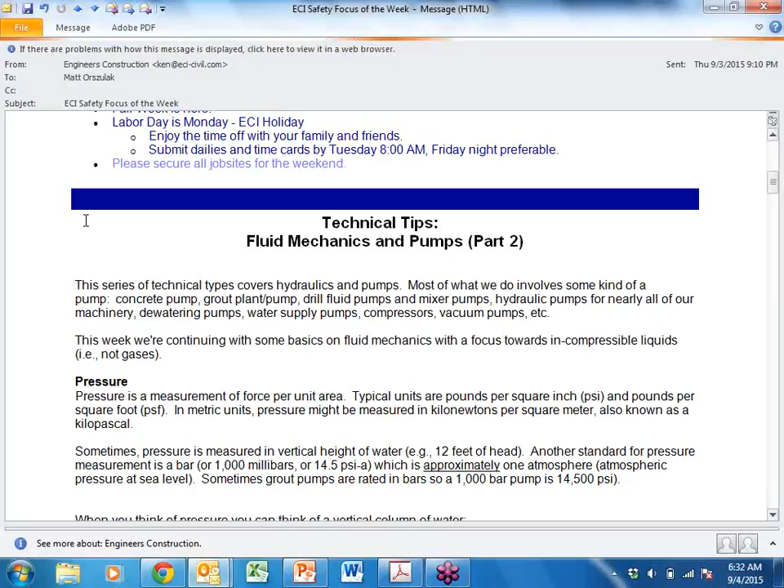Technical tips: we've been talking about fluid mechanics and pumps. This is just the second in our series here, covering hydraulics and pumps. Most of what we do involves some kind of pumping - we pump concrete, grout, drill fluid pumps, mixer pumps, hydraulic pumps in nearly every piece of equipment. We have dewatering pumps, water supply pumps, compressors, vacuum pumps, chemical injection pumps. Right, Larry? Larry's shaking his head, oh no.

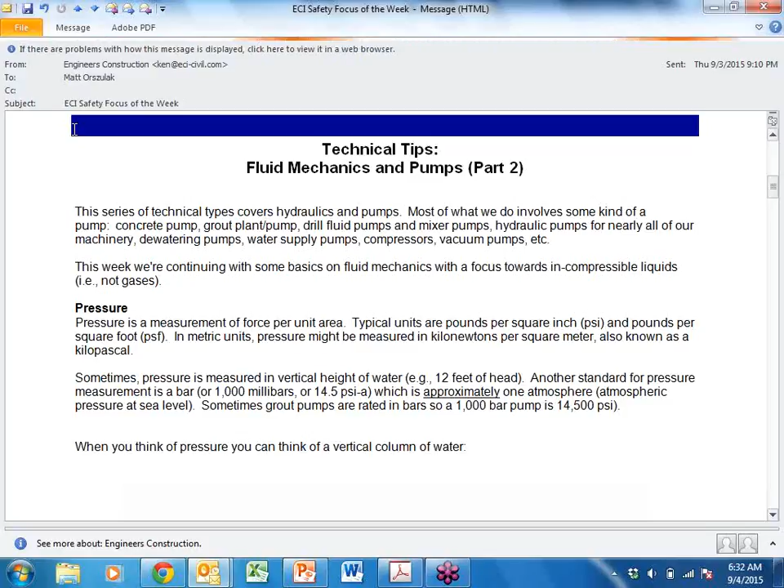This week we're continuing with some of the basics, and I want to talk about pressure. Last week we were talking about unit weights and specific gravities, but this week we're talking about pressure. Typically, pressure is a measurement of force per unit area, so typical units are pounds per square inch (PSI) and pounds per square foot (PSF).

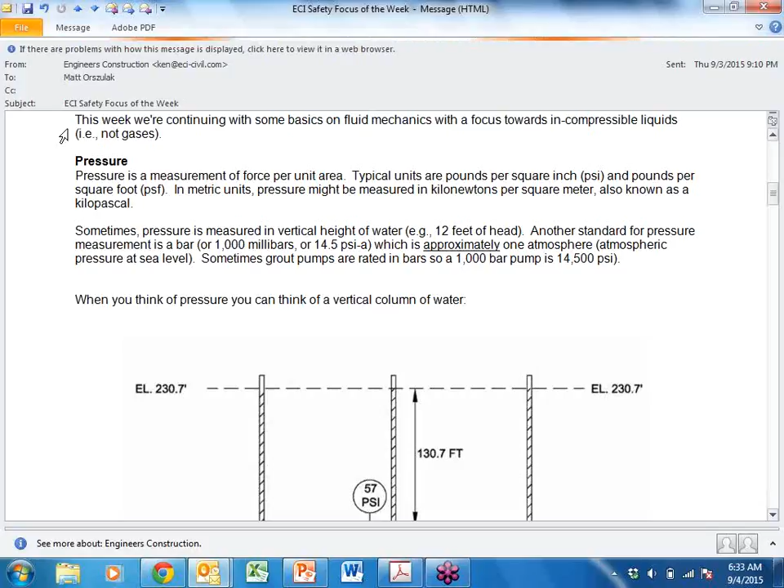One thing I can never get my head around is metric units - pressure can be measured in kilonewtons per square meter or kilopascals, whatever all that is. Sometimes we measure it in vertical feet of water, which is also hard to wrap your head around, like 12 feet of water. Another standard is a bar, and we hear that on the weather - the barometric pressure is 985 millibars. So 1,000 millibars is 1 bar, and that's the atmospheric pressure at sea level, more or less, roughly 14.5 psi.

So there's actually a pressure out around us, and I said approximately 1 atmospheric pressure at sea level - not really sure why an atmosphere isn't really a bar, but it's slightly different, just to make things complicated. Even pumps, like a grout pump, are rated in bars - there can be a 1,000 bar pump, a pretty high pressure pump, up to 14,500 psi. Those are usually used for jet grouting, something we don't really do, but it's a high pressure injection of grout in the ground to mix with the soil.

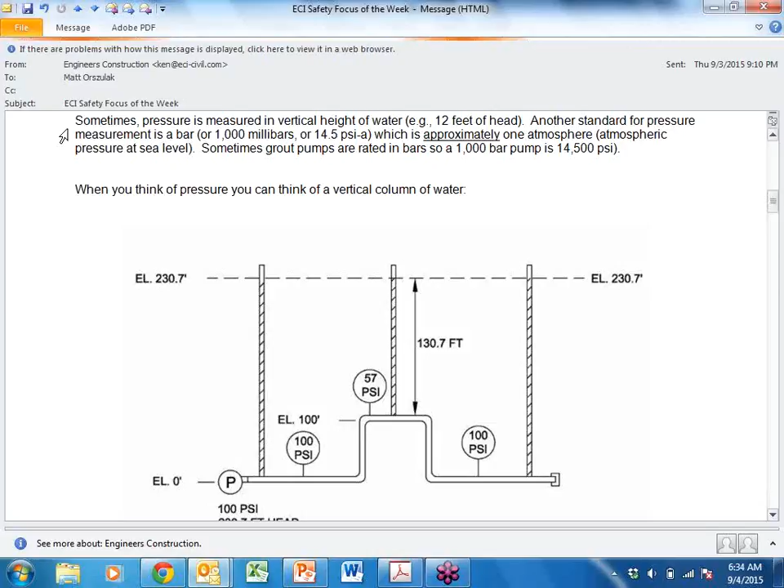I want to talk about how to think about water pressure, or any kind of pressure, with water as the example. Imagine a pump with a water line, measuring with any kind of glass tube, if it can handle the pressure, coming all the way up. If you're pumping at 100 psi at the pump at elevation 0, the pressure would be a head pressure of 230.7 feet - that much of a head, or column, of water. And when talking about a column of water, it doesn't matter whether it's a small glass straw or a big pipe - either way it would push to the same height. That's something a little hard to get your head around.

And if the pipe goes uphill, say up 100 feet, it still has the same pressure head at 230 - the PSI just drops. If it goes back down, it'll continue at that same pressure head for the whole system. Now this is static - if we had a valve in there and started turning it, things would change, depending on where the pumps were and the back feeds and everything. So from there it gets more complicated.

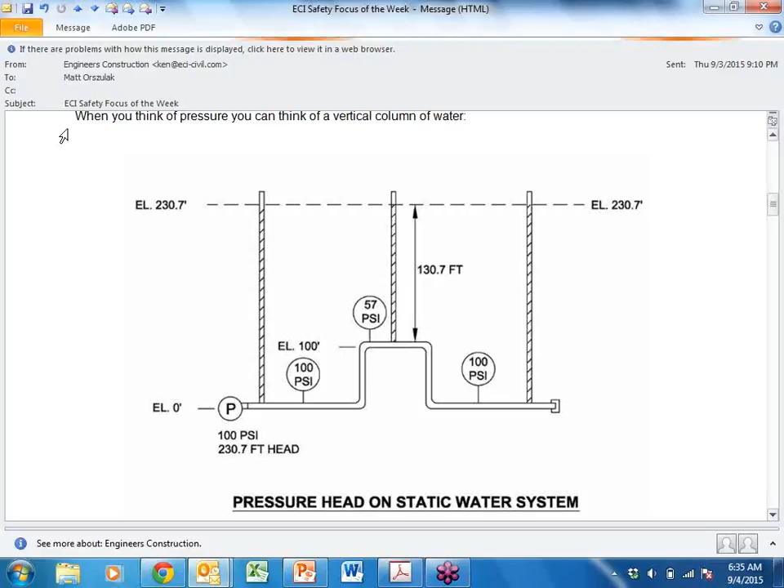So what I thought I'd do next week is talk about, when we do a thrust block, where those forces come from and how you could figure out what those forces might be for, say, a 100 psi pipe. So we'll talk about that next week. Kind of relates to a lot of what we do.

One thing we should always do, and I didn't do - I put this illustration together fairly quick a couple nights ago, gave it to Ray to do on the CAD. I didn't have anyone check it. I should have given it to Brendan or Ben or somebody. I was in a hurry, it was late, I got it. Then in the middle of the night last night, I'm like, oh, I wonder if that number's right. So the lesson is, it's a good idea to have people check everything before you submit it and put it out in front of a big audience. But it happened to be right, so I'm good.

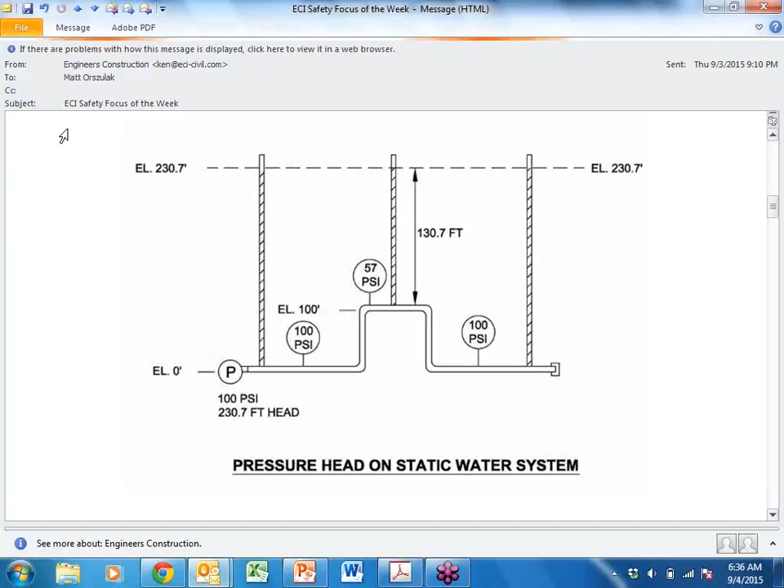So just some updates for our Labor Day, different project updates. And just to congratulate our whole workforce, it is Labor Day after all, for the quality work we've done so far in 2015. Just some pictures that seem pretty cool.

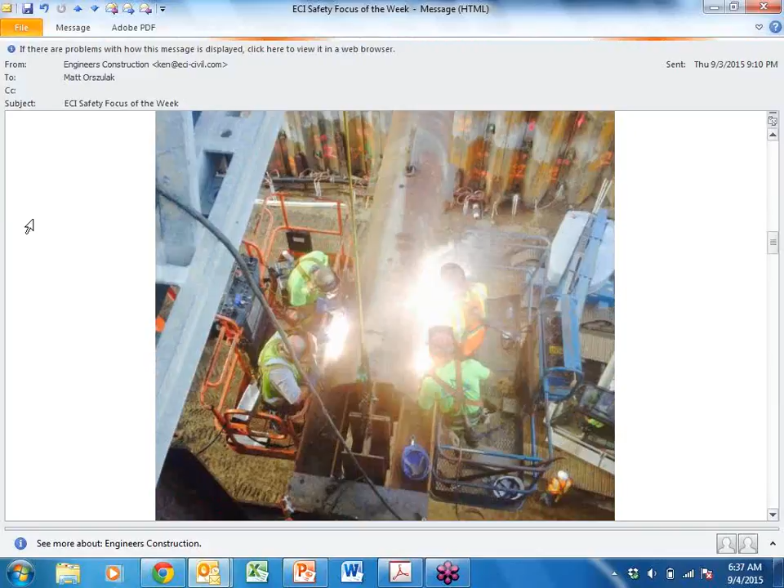This one is from Rygate. They're installing a strut - we got 4 guys, one in each man lift, or a pair in each man lift on each side. Each of them are burning welding rod right there. So pretty cool, and this strut is supporting the excavation. The excavation down there is around 60 some odd feet deep. You can see a man way down there. The picture's taken from up on the bridge - there's the railroad bridge. How long was that? It's like 55 feet total, 30-inch diameter. So that was Rygate.

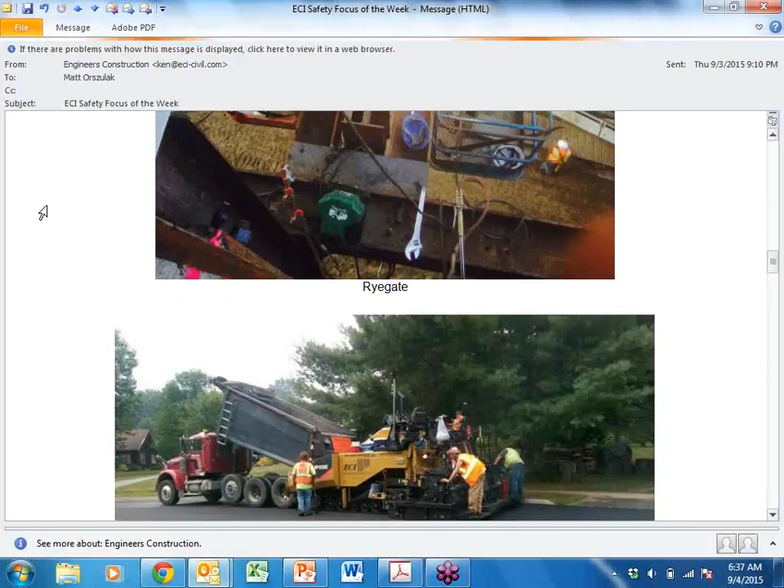This is Vale Drive in Essex Junction, where the guys were paving yesterday.

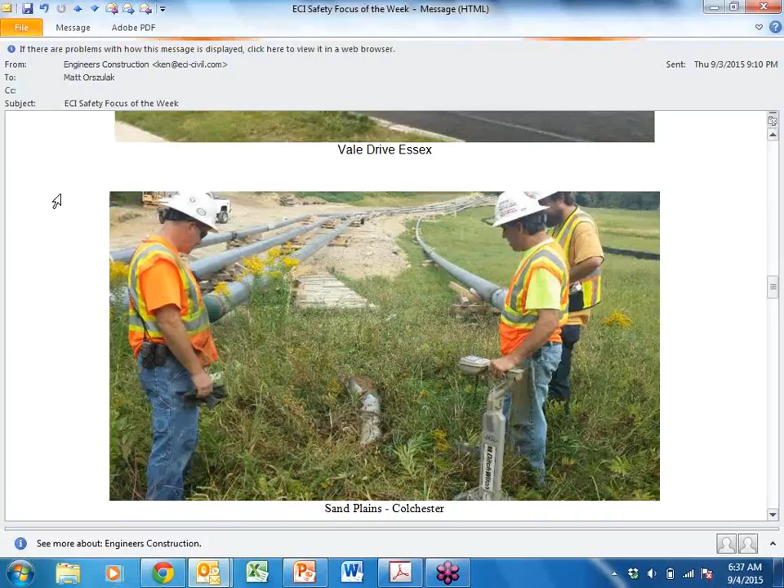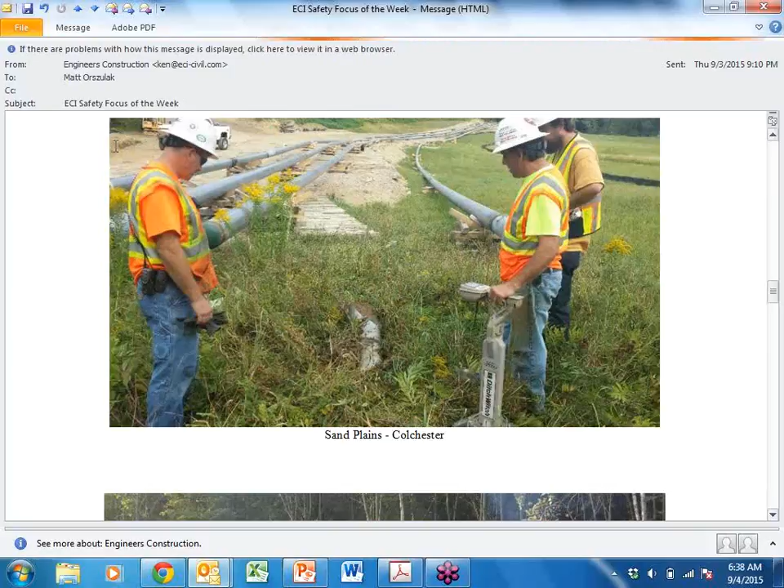And this is the sand plains on the Colchester side last week, where we poked out of the ground with the big drill. There's all the pipe strings there ready for us to pull in. And here's sand plains again, but on Gauthier Drive.

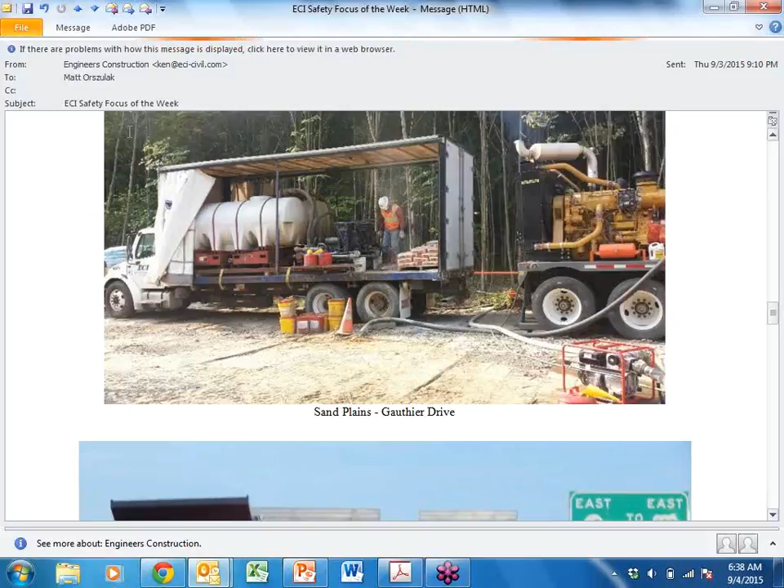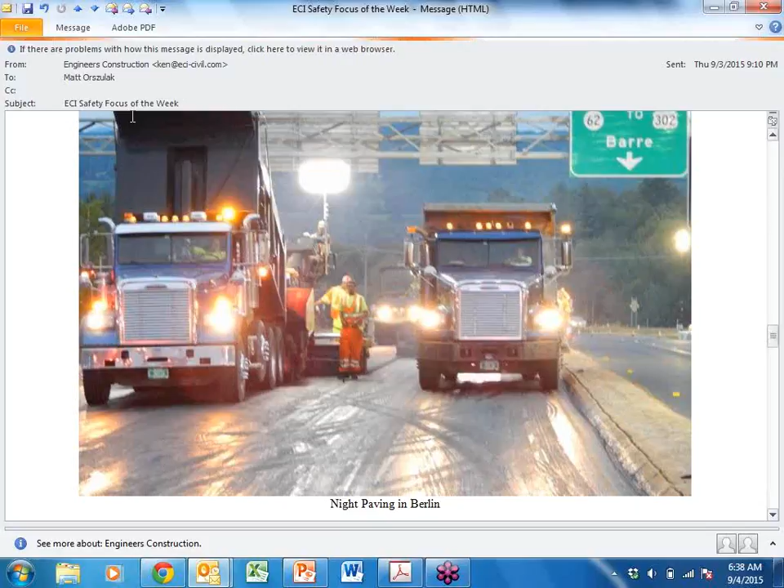This is the paving last week, night paving in Berlin - the sign says Barre, but it's Berlin. It's on 302 or 62, isn't quite to 302, like if you're getting to 302, drop down the hill to 302. That's pretty cool - these balloons give off a great glow of light, and it's not so overpowering as the big 1,000-watt lamps on the light plant.

This is East Road in Colchester, where we reinforced a failing culvert. That's a steel plate with grout or concrete backfill behind it, where it was damaged. It had failed - a longitudinal failure right through the culvert, a corrugated metal culvert.

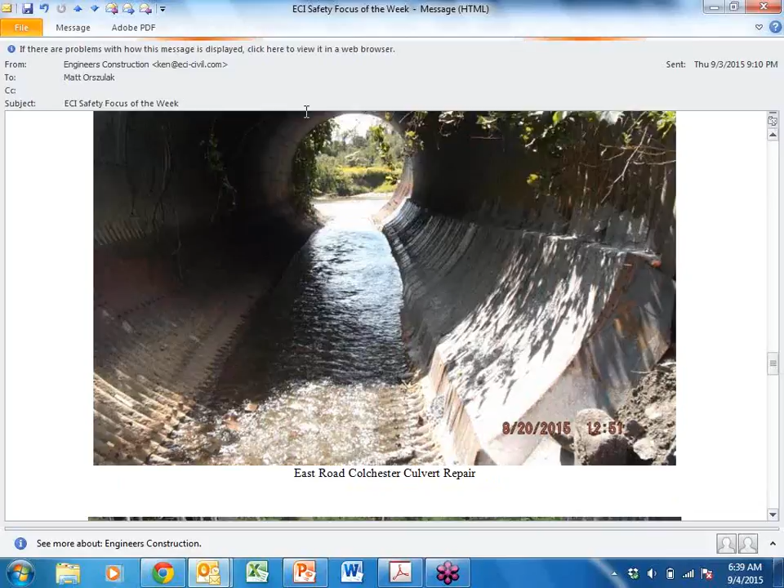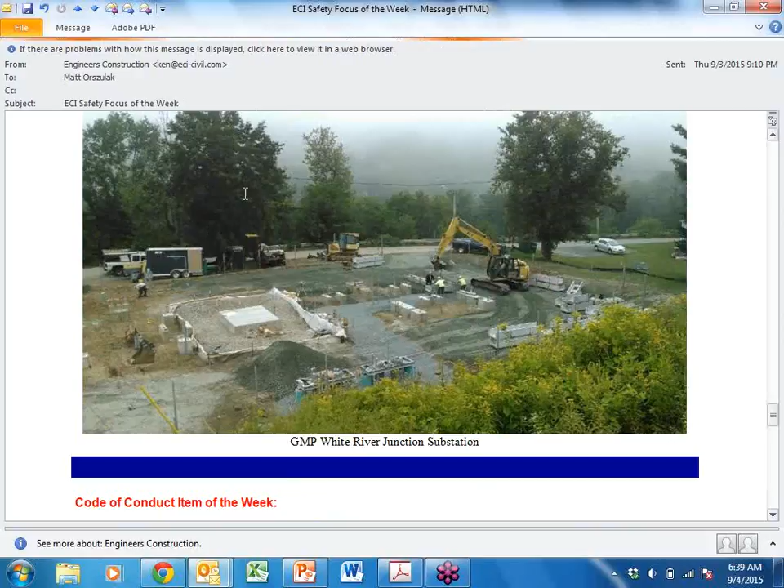And this is the Green Mountain Power White River Junction substation on one of the foggy mornings, obviously. It's right there in the Connecticut River Valley, essentially, so it gets that fog.

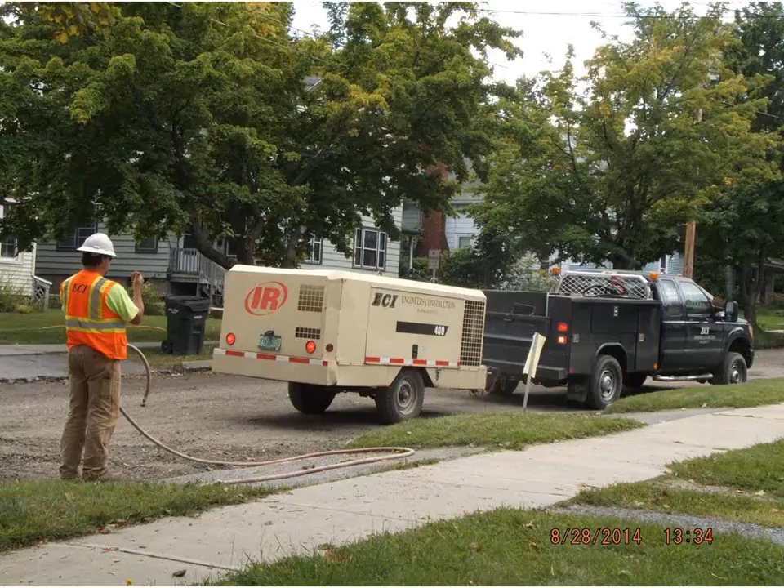Spotter's responsibility - I have some pictures here, you can see some really good stuff we're doing with backing. We've had a lot of little backing accidents, especially here in the yard. When you see a coworker backing and there's no spotter, go out and help that person back that truck, trailer combination, whatever it is. Make sure you can always see the operator - the individual is looking in the right rear mirror, and he's able to see the driver backing the person up, putting that truck right where it needs to be, away from any danger or harm. We've had a lot of incidents with backing trailers, jackknifing things, so let's use spotters, let's not be in such a rush. This is just as important as our daily planning and tailboard that we do for a big project.

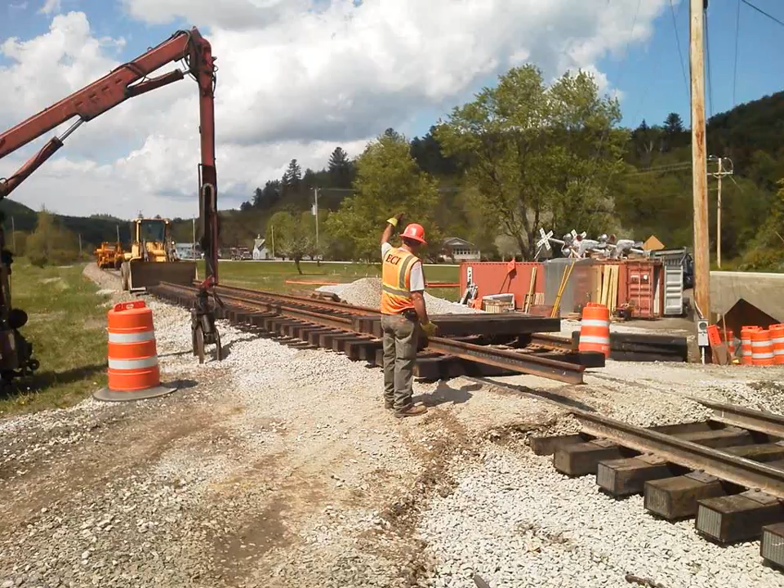It's a lot of these little activities that we're doing that are getting us in trouble and damaging our equipment. You can see here is another good scenario when we got a good two-man team here. They're guiding some rail in.

Again, your hand signals should be somewhat uniform. So during the tailboard, let everybody know what you're going to use. Everybody's been working together for a long time now, so they understand each other's language, but if you have a new guy—and we've hired a lot of new guys in the last 2 months—communicate with them about what type of hand signals we should be using on site.

Not all crews have walkie-talkies all the time, so always use spotters whenever we're trying to put ourselves in tight quarters. We have a lot of really tight jobs right now—Rygate, CCTA. Anytime we're working on the rail or in the roadway, our job sites are very confined, so there's a higher potential for personal injury, utility damage, or property damage. So use spotters, make sure everybody has someone with them. We're working in teams of 2, not by ourselves, and we can do this work safely without getting anybody hurt or damaging any equipment.

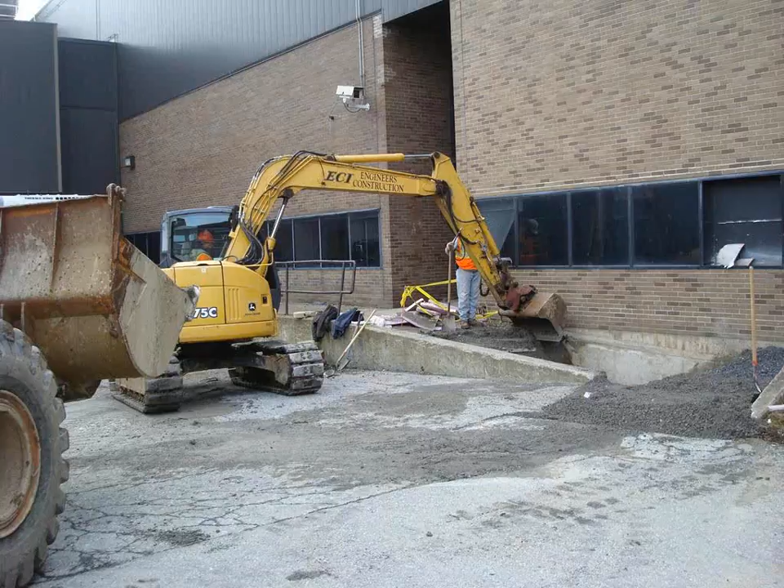You can see here working tight to buildings, guiding that. This is Joe Prouse—I don't remember who his operator was here—but he's positioning himself on the cab side where he has direct eye contact with the operator. That's what we want. We always want to be able to see them, and they can see us. When you can make eye-to-eye contact with somebody, you know you're on the same page.

I see all the time guys looking down in a trench doing a bunch of hand signals, and they're positioning themselves in the wrong spot because the operator can't see them—either the arm's in the way or the bucket's in the way. So put yourself in good, clear sight.

One person should be directing the operator—crane operator, dozer operator, whatever it is. It should be one person, not 4 or 5 people. Make a point of contact during the tailboard each morning, saying, hey, Gene, today you're going to be the spotter for this operation. So we're all on the same page, and we're all going to help each other out so everybody goes home safe and sound and we don't damage our equipment.

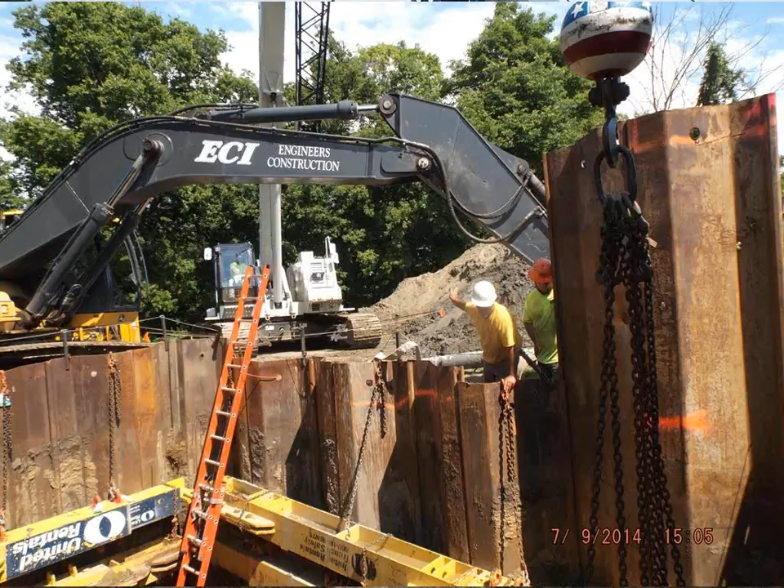You can see here another situation where we got a crane going in, an excavator in a deep sheeting operation. This was at St. Mike's last year. Very difficult when you don't have clear eyesight to what you're trying to do. Spotters—we need to have them, and they need to be on the same page.

It's very important to our day-to-day operation that everybody understands the responsibility of the spotter is to actually guide, almost be an operator, to guide them into these tight quarters so nothing happens, so we can perform the work safely without damage to our equipment or to any person. It's a very important responsibility to have spotters, and spotters shouldn't be on their cell phones.

They should not be texting. They should be readily alert at all times and paying attention, because we do a lot of very dangerous things day in and day out here, and we need to make sure we're all bringing our A game to work. These operators are relying on the spotters, so it's a very important operation, like I've been saying.

Hand signals should be somewhat uniform. We don't have to use the crane signals for excavation operators, but everyone needs to be on the same page. And the operators, again, if you don't feel comfortable, stop. Stop, address it, and let's get on the same page. At the same time, the operator is still kind of controlling the situation, but they should stop if they feel like they're getting too close.

That's one thing we're also seeing a little bit—everybody's safety zone or clearance zone, everybody's getting a little too close without having a spotter. So if you're backing up and you feel like you're a little close, stop, get out, address the situation, saying, okay, hey, I'm too close. I need a spotter before I continue to back up or operate a piece of equipment in tight quarters.